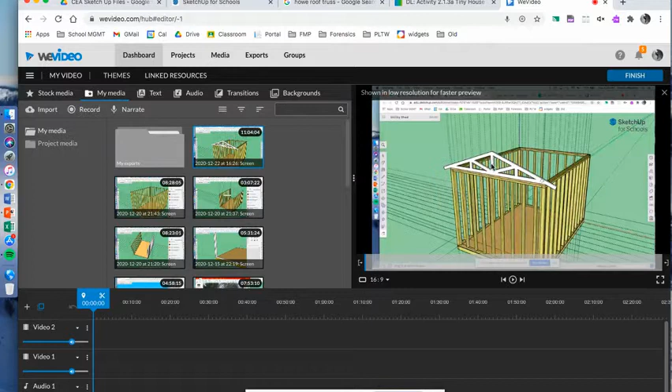This is going to be a tutorial video for building your roof truss on your shed. You're going to want to have something looking like this when we're done. I'm modeling the roof truss off of a Howe truss. I'm not really sure how to pronounce that, but if you Google image it, you can get an idea of what they look like.

This one has a 6/12 pitch. Our specifications are calling for a 5/12 pitch, and I think the way they got there is by using the dimensions provided on our specification sheet on our 2.1.3A tiny house. The distance from the floor to the roof is 10 feet, and then the distance from the floor to the top of our truss is going to be 12 feet and 4.5 inches.

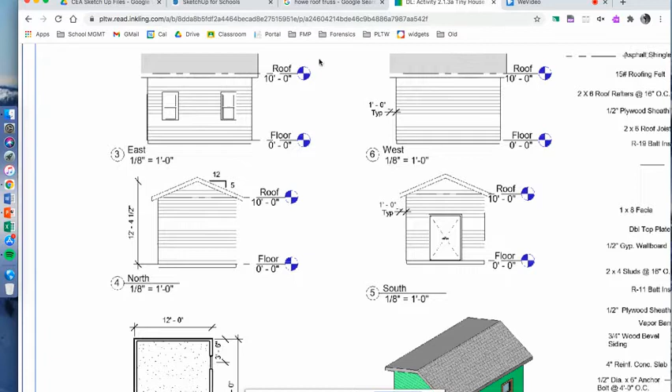So simple arithmetic tells me that the distance from here to the top of our king post, which is this center piece of the truss, or the bottom of our top chords, which is going to be right here, that distance is going to be 2 feet 4.5 inches. So that's the distance that we're going to use when we start modeling our truss.

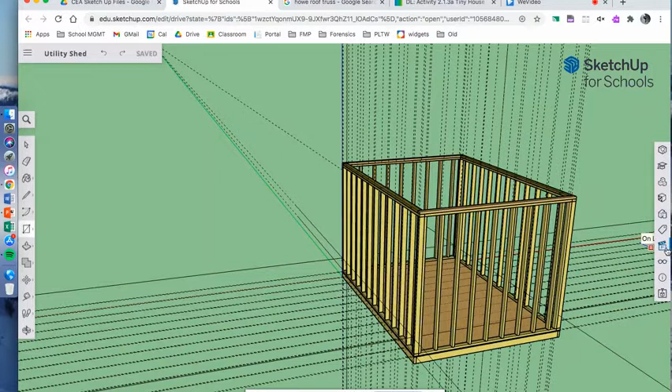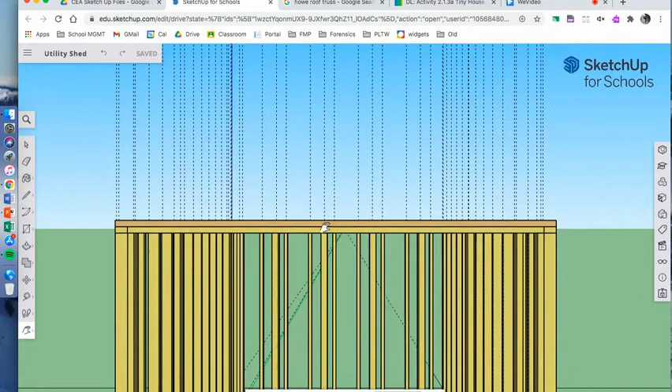I'm going to go into the scene view and click on the front of the house. And then I'm going to pan up a bit to try to get my view a little level. And I'm going to zoom in a bit and get rid of this toolbar. I'm done using that. And then I might zoom in just a bit more and rotate up just the tiniest bit so that I can see this front edge of that top plate running along the front side of my shed. I want to draw a rectangle from this front corner edge across to this front corner edge.

The first time I did this, I did it quick and I wasn't paying attention. I drew it from here to this corner, and I had like a diagonal piece of lumber started, and that was so frustrating. So learn from my mistake and make sure that you're connecting your rectangle from this point all the way over to this front point, which should be 12 feet.

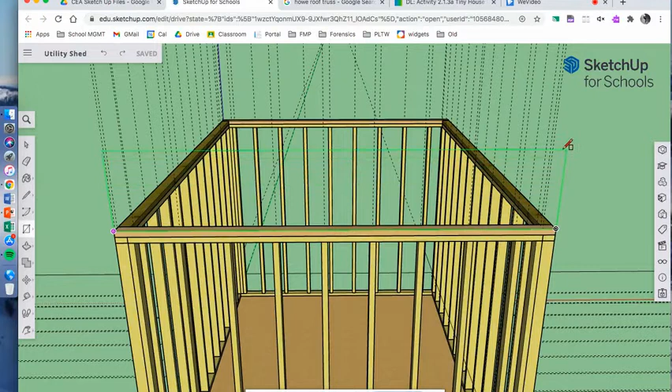And then you're going to go up on this. Make sure your rectangle is highlighted in green, showing that you're going straight up on the green axis. You're going to go up 2 feet 4.5 inches. So that's going to bring us to there. And that's going to be our starting point for building our truss.

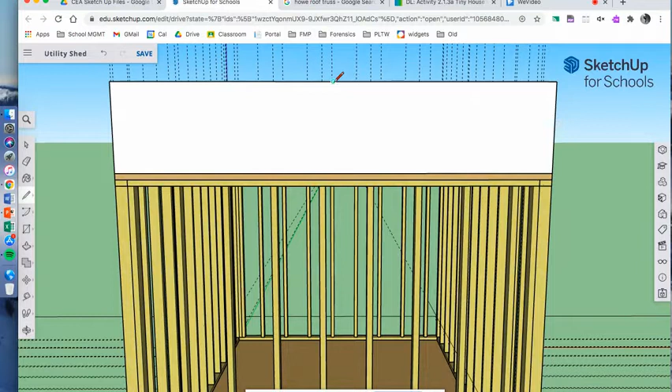Okay. The next thing I'm going to do is use my pencil tool. We have not used the pencil tool much in the tutorial videos in class so far, but I think we're going to start using it a lot more. We're going to hover along the top edge of this rectangle and find the midpoint. It should be highlighted in blue. Once you find the midpoint, you can click and drag a line down to the midpoint of the bottom part of the rectangle.

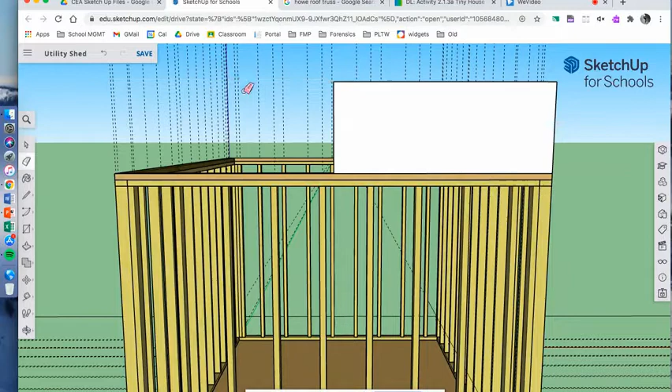Now, just like in the other tutorial video posted to Classroom, you can click on this half and click delete. And then you can also use your eraser tool to get rid of these lines that we're not going to need. There's going to be another line right in here that you don't need, but I don't know how to delete that at the moment. So we're just not going to worry about that other line just yet.

Okay. So I've got this rectangle that I'm working with here, and this is going to be like the template for our truss system. The first thing I want to do is make copies of this top and bottom line to create my 2x4s. We're going to use the move tool, which is down here on the left, and it's the top part of that tool. And we're going to select the midpoint of this top line and hold down our control key, which is going to allow us to make a copy of it.

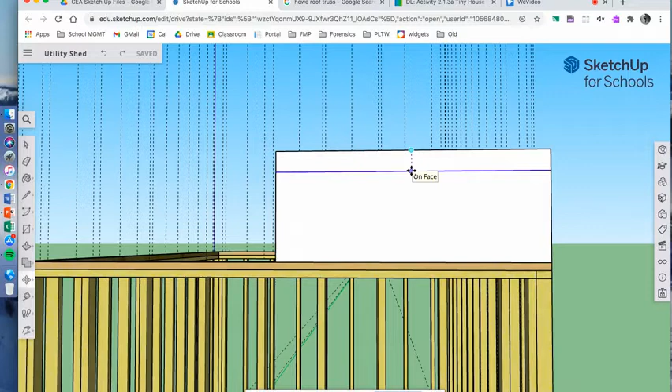And we're going to drag perpendicularly down, and we're going to type in 4 inches, which is the dimensions of the thickness of a 2x4. The first time I made this truss, I used the 2-inch dimension, which was not the right choice. And to be honest, 4 inches isn't correct either, because that's the nominal dimension and not the actual dimension. But again, for this first go around, we're just going to use the nice round numbers to try not to give ourselves too many headaches while we're learning how to do this together.

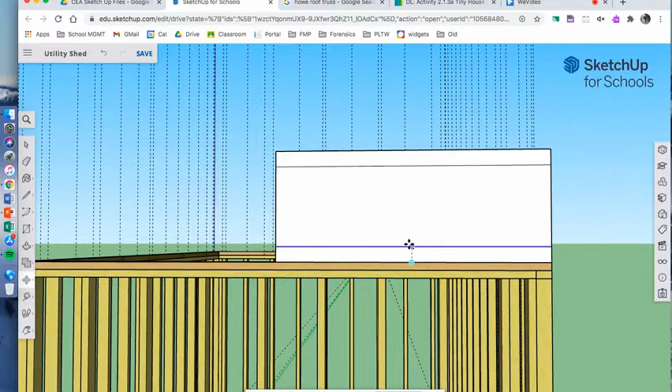So I'm going to bring this up 4 inches and click, and now I've got 2 pieces of lumber that are started. You can use your eraser tool to delete this line, which will give you the 2 pieces, and then you'll still have a solid black line here in the center, and you're going to need that, so don't delete that yet. The next thing that we're going to want to do is we're going to want to rotate this top of the top chord down to this edge of your shed.

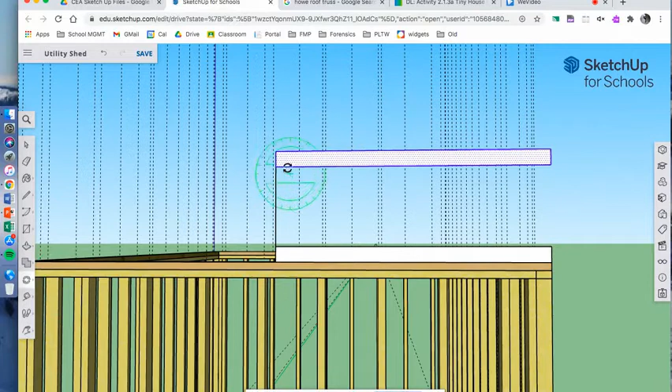So we're going to first use our white cursor tool and double click on this rectangle and make sure that it has the blue outline, the little blue dots in the center. And then you can come down to your move tool and change it to the rotate tool. It's the middle option of the move tool. Okay, so you'll have this protractor looking thing. You can zoom in and you can select this endpoint, and you're going to then select this endpoint, and you should be able to move your rectangle down to the edge.

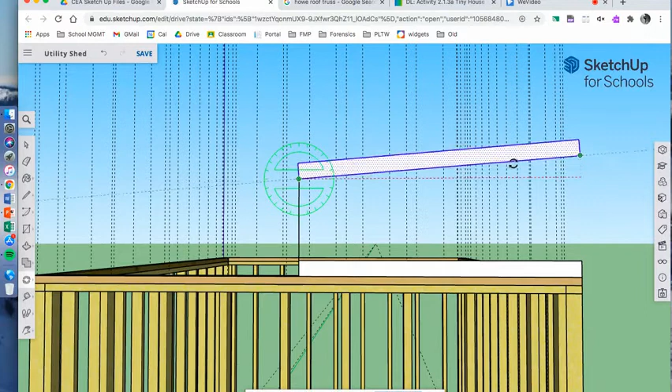If you start doing this and this geometry down here starts getting really out of whack, it's because you did not select the top rectangle and have the blue outlines like I do. Okay, so we're going to drag it down, and it's not going to reach, but the extended dotted line tells you what angle you're working on, and you're going to want it to intersect with that edge of the shed, and it should snap there with the inferencing on SketchUp. So we're going to put it right there on that edge and click to complete that move.

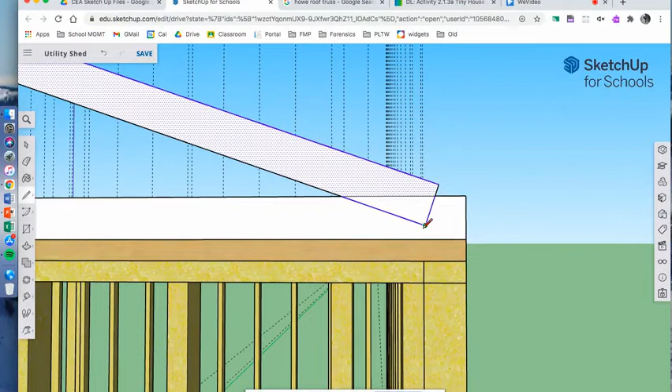So now that top chord is rotated, we're going to extend these lines. And then I think I'm going to pause the video and take this slower for those of you that are just following along here. So I'm still using my move tool. What I want to do is select the pencil tool, okay? And now I can click on this corner and I'm going to extend the line out. I'm going to extend it out about 2 feet. And you want to make sure that the line has turned pink to know that you are running parallel to the extended edge, and you can click a line, okay?

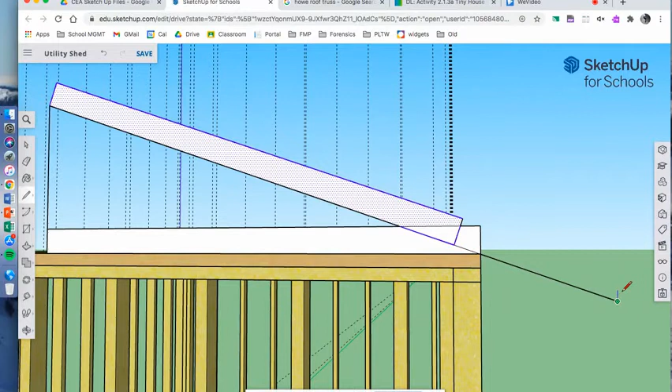And then you're going to want to drag a line up, and you want it to be perpendicular to the line you just drew, and more importantly, parallel to the edge of this part of the lumber. So once you're running perpendicular to it with the magenta line, you're going to go up that distance of 4 inches, and then you can go ahead and connect it to the other end of the board. And then once you've got that done, you can select your white cursor tool and just click out here to outer space. The last thing I'm going to do in this part of the tutorial is delete some of these lines, and then we're going to move on with part 2.

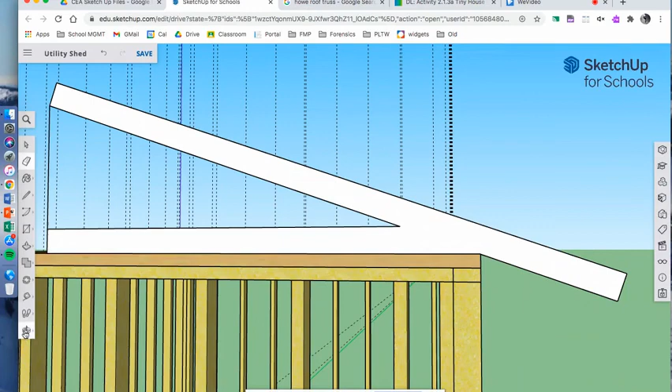All right, I'm going to grab my eraser tool, and I'm going to select these interior lines that we no longer need or want. And now I should have one full piece of geometry that I'm working with. And we're going to figure out this edge and add some more pieces to this truss in video part 2.